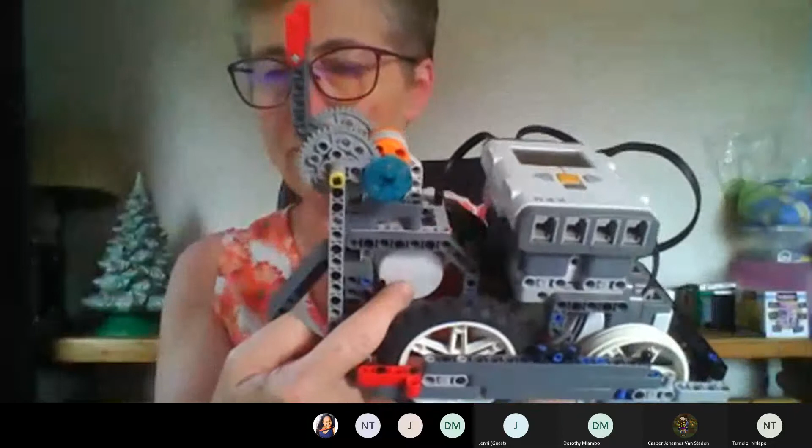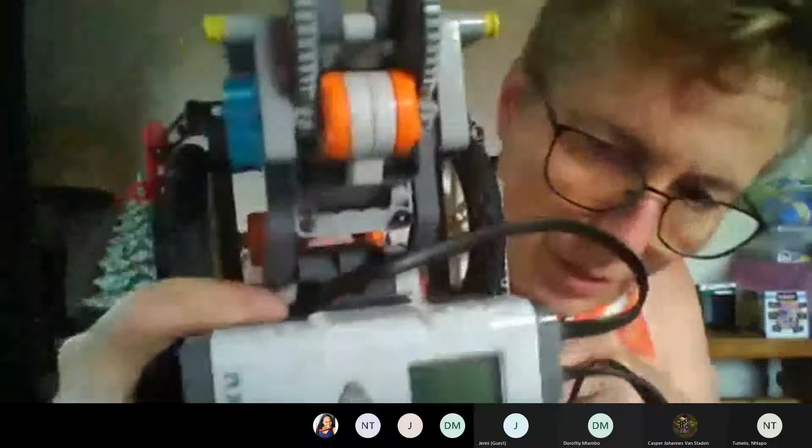So this is old Mozart. Mozart has got, you can see the motor here, and the motor has got an arm on it. So this thing goes up and down, so we can program this motor to let the arm go up and down. But the arm, the powered attachment that we're going to program, is controlled by gears. I don't know if you can see these gears over here, down here. So on the motor itself, through the motor there's an axle.

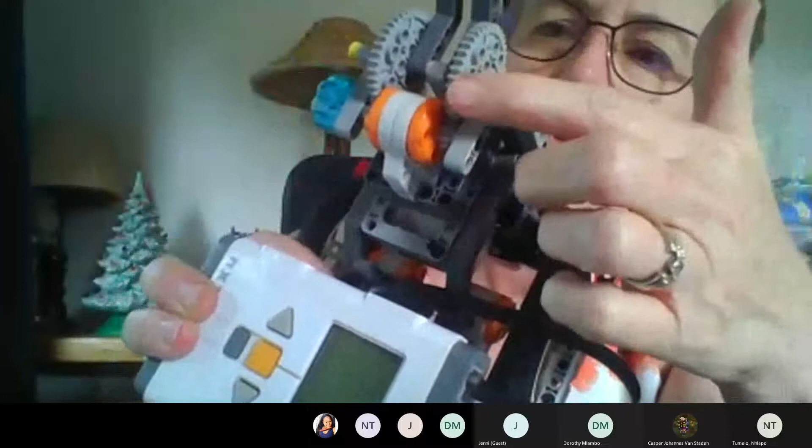And then there is a driver gear, and the driver gear and the larger gear are on the same axle. That is what today is all about. We're doing gearing and power attachments together, because gearing is applied in power attachments.

So what does gearing do? With gearing, you've always got a trade-off. You either have speed or you have power, and that's what we use gearing for. It's like a car. If you're in first gear, you have much power, but you don't have that much speed. By the time you get to fifth gear, you're going to struggle to go up a hill, but you have speed on the flats. So there's always that trade-off.

So with gearing, you've got a rotation or a movement, and you can use gearing to increase it, decrease it, or change its direction. I'm going to go through it.

So the gears of a robotics kit are always lots of fun. You get these things and you think, oh, this is a lot of fun, it'll make a real cool designer. But this is the rack from the rack and pinion. And then my favorite is the worm gears, and I can't find my worm gears in here, I have to go and look for them. Okay, so that's where we are.

We're going to do some gearing. Again, you can get away with building a robot without gears. You can get away with a robot with only passive attachments. But you want the learners to take the next level. So all those teams that are doing second year already with competitions, you need to up your game. There's always that ongoing learning of increasing complexity.

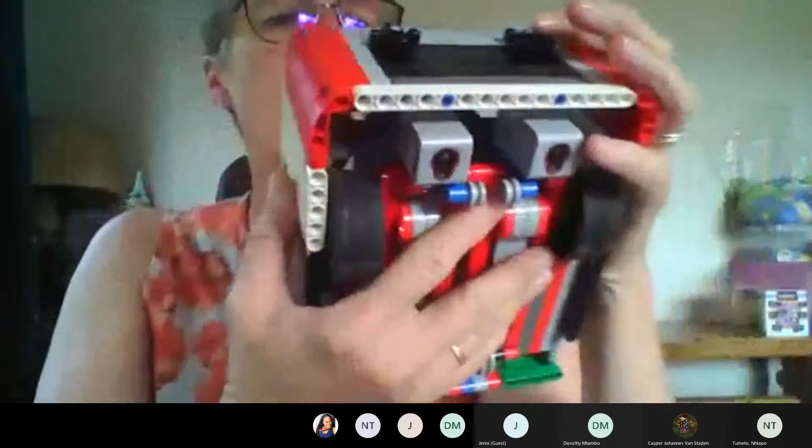So what knob gears are used for is, you can see on Mario, there's these two knob gears over here. But these knob gears are actually, can you see? You can't really see inside here. Inside here, the knob gears are attached to two medium motors, which means that you can then attach powered attachments onto here, and then the motion is transferred through this gearing mechanism. So your powered attachment is attached onto the robot, and the power part comes through here. You can use multiple powered attachments on these two parts, and that is where also for powered attachments you must have a motor that you can program.

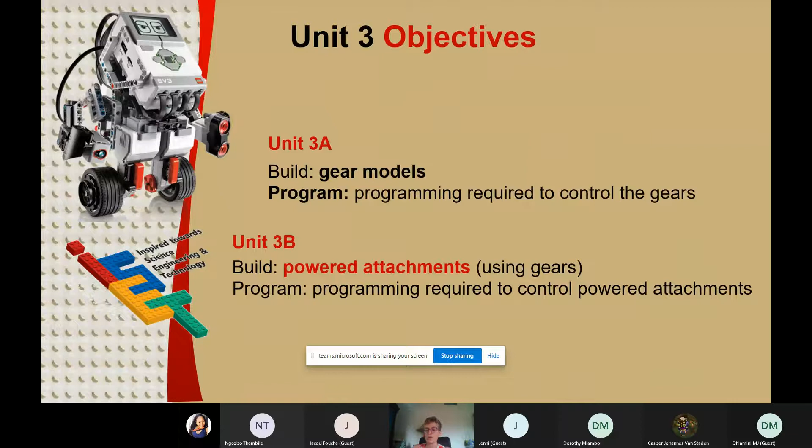Okay, so for unit 3, there's an A and a B part. The one is the gearing models, and you've got to write the programs to control those gears. And the next part is the powered attachments, hopefully using those gears. So you build a model and then you write the program, but it's important to test every combination, because otherwise your learners are going to think, I can do this, but they can't actually because they haven't built it.

All right, so a gear is any machine part that rotates. It's usually got teeth that mesh with the teeth of another gear.

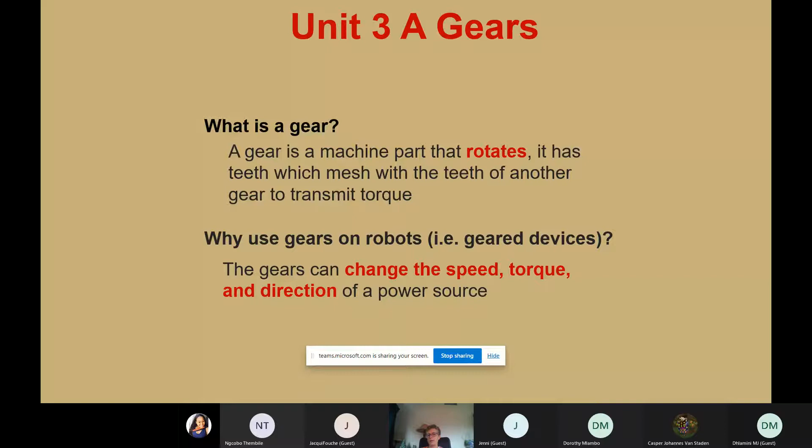And why do you use gears? Well, there's speed, there's torque, and there's direction of power source. So some of the gears are used to make rotational movement linear, and that would be, for example, your rack and pinion. Some would be to change direction, maybe for a bevel gear, where it changes direction of 90 degrees.

Okay, and I'll show you some examples. There's lots of really cool little gears in your robotics kit. So, for example, the rack and pinion. That is the pinion. This is the rack that moves, and the axle at the back there, that's the one that's attached to the large motor.

Building gear trains is a lot of fun. If you attach that axle that goes through the driver to a motor and see what happens, and then you try put the axle to the larger gear as the driver, and then you see what happens and how many times does one turn and how many times does it not turn. Okay, I'm actually going to show you an example quickly.

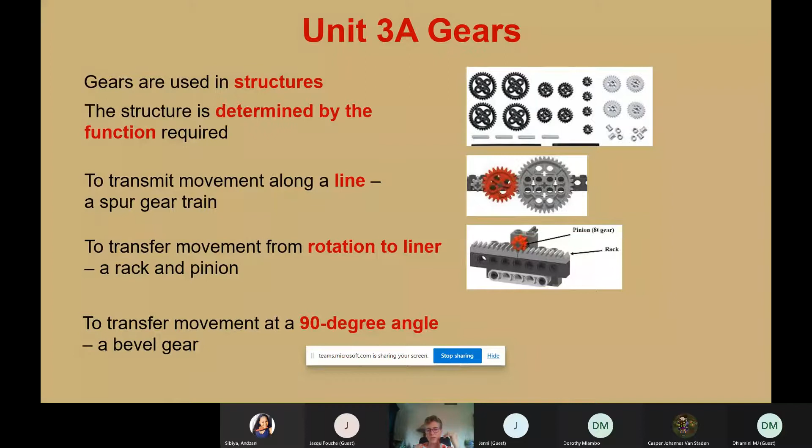And then to transfer movement, you always like the bevel gear that goes the 90 degrees, so they're meshing at 90 degrees. So these are the examples. The spur gear is kind of the normal little round gear. The crown gear kind of sticks up in the sky, and the bevel gear is at 90 degrees. You sometimes get double bevels.

The worm gear is one of my favorites, and the clutch you don't use that often, but if you do use it, your learners have to know how to use it. The knob gear, I think, is the most popular one, and it's one of those gears that you can use, and as soon as you use it, it gets confidence. Your learners can say, 'Oh, we can do gearing. We're good.' That's a really cool little gearing thing there.

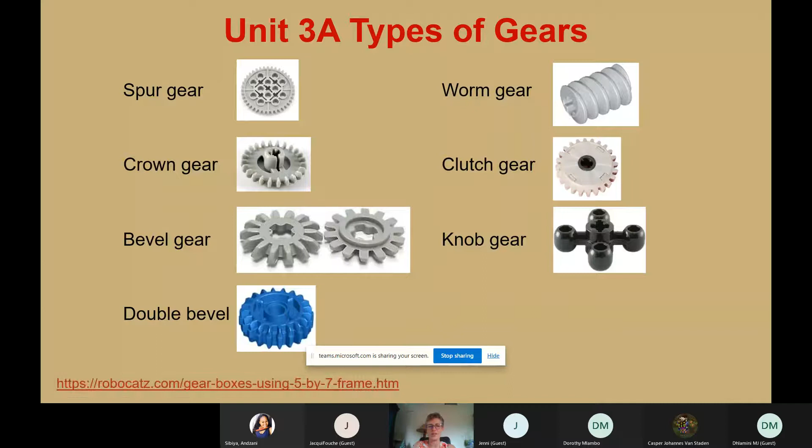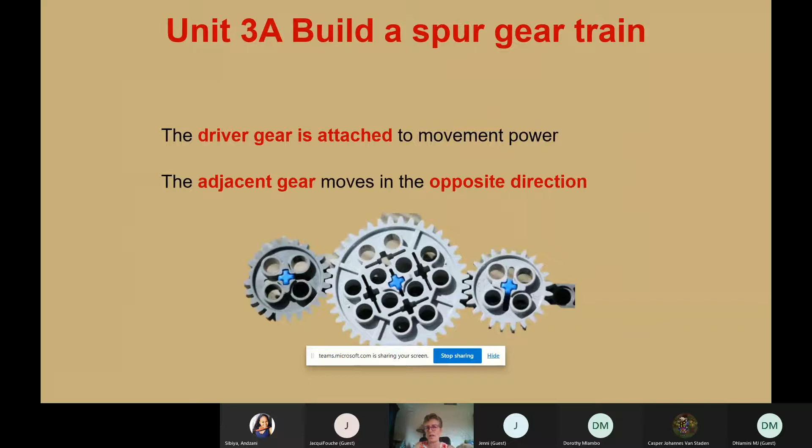When you build a gear train, you've got to have a driver, and then you've got to have a driven gear. But the little idler in the center, the learners have got to register that the one is moving in one direction, and the other one is moving in the opposite direction. And then so every second one moves in the same direction.

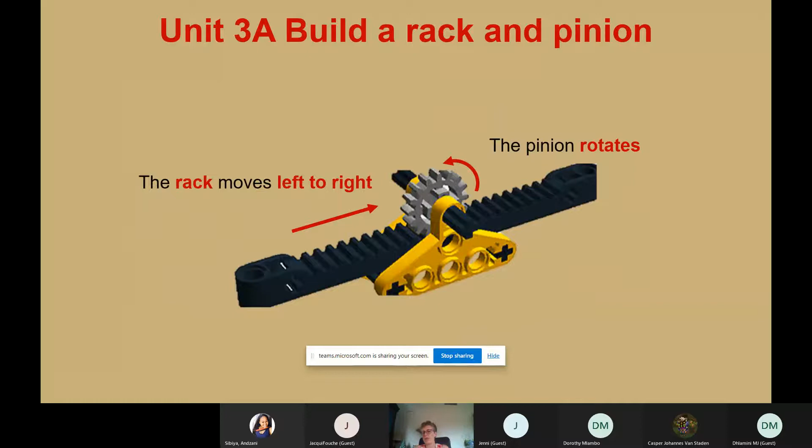The rack and pinion, you've got to know the pinion is the one that you attach to the motor. So if you're going to make the pinion rotate, then the rack will move left to right. But if you don't play around with it, the learner's not going to get it. You can show them as many pictures and little arrows as you like, but they actually have to do it. So I would say have a really good gearing class just to explore the gears.

If you're doing programming, so this would be programming - you attach a motor, say motor A, and you let it run for, say, 10 seconds, and you'll see what happens. That's just if you have a spur gear, then there's no restriction on that.

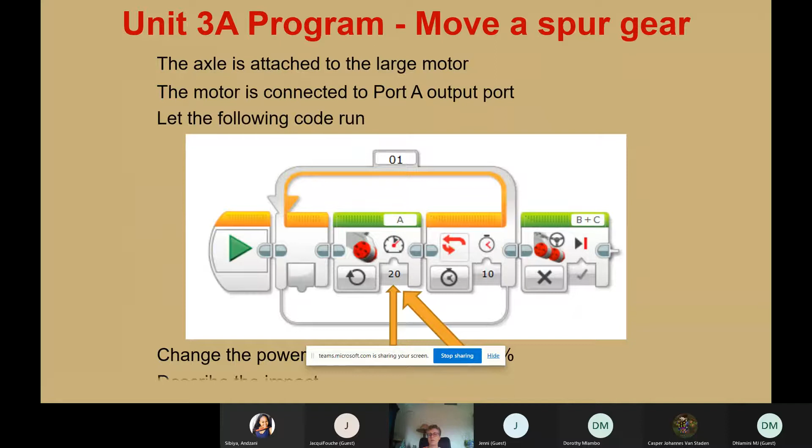But then change the power and say, okay, why don't we make it 50% power or 100% power or something, and then we'll see what happens. And then the learners must be able to explain to you what is the best gearing speed, or power setting. And the same is with the bevel gear.

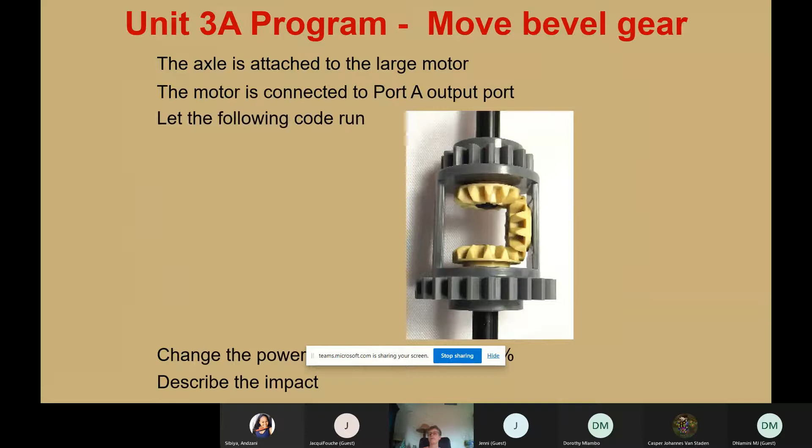The bevel gear is at 90 degrees, and you can run the code. It looks very nice and neat, but if you turn it too fast, well, maybe it's not going to be great. So let the learners do it at 20% power, 50% power, 100% power, and then tell you what the impact is. Now I'll show you some examples as well of different gearing structures that we have.

The problem with powered attachments is they must be well built, otherwise they are a total disaster. The other one, let me just quickly say, if you have a powered gear, you must have a motor. You can use gears in brackets, but it requires programming to function. If you use powered attachments, please always program with time.

Please program with time. I'll show you now an example.

So when you have a powered attachment, where do you attach it? Well, that depends where you need it. If you need to pick up something in front as you're going along, maybe in front, in the center, at the back.

A powered attachment can be attached wherever it is needed. But here's the kicker: it must be attached as a structure, and it must be connected with wire for function. Otherwise, it's not going to work. It needs structure and it needs function.

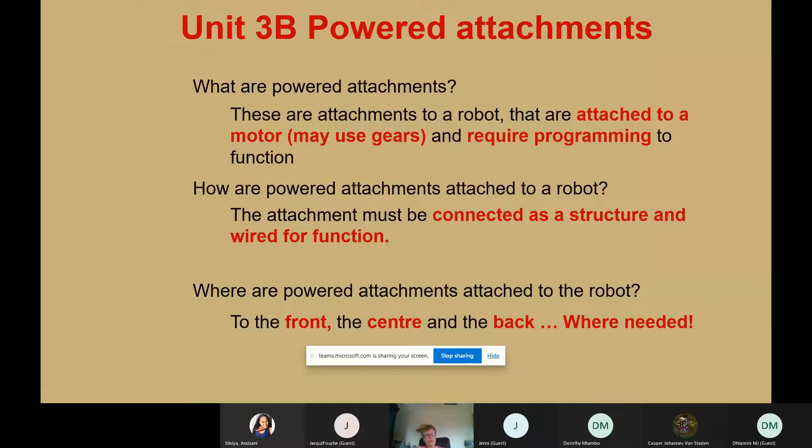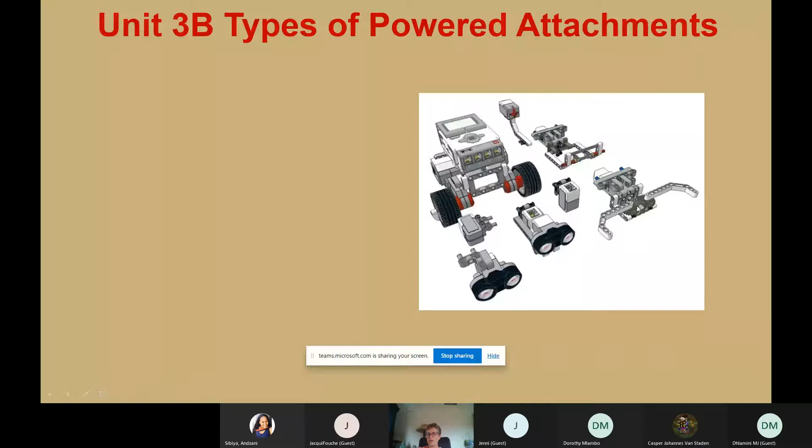So the cargo loader moves up and down. Can you see there? And the grabber moves left to right, and grabs something. So you can grab, you can lift, you can push.

But, and I say it again, let your learners first build these powered attachments from building instructions. And then you change, then you modify. Then you say, okay, so that one can lift something up, but it might fall through there. So we adapt that. This one could grab maybe an apple, but maybe it's too heavy - it's not going to be sufficient to grab a tin of condensed milk.

So the powered attachment is grab, lift, and push. But it can be multi-purpose. So the same grabber can go forward, collect, and reverse, or it can go hold something, move forward, and deliver. So already we have two purposes for one attachment.

Exactly the same as that - this one here with the cargo loader. So you can leave base with something in your attachment, and you go forward, and you can drop it, or you can go forward and pick it up.

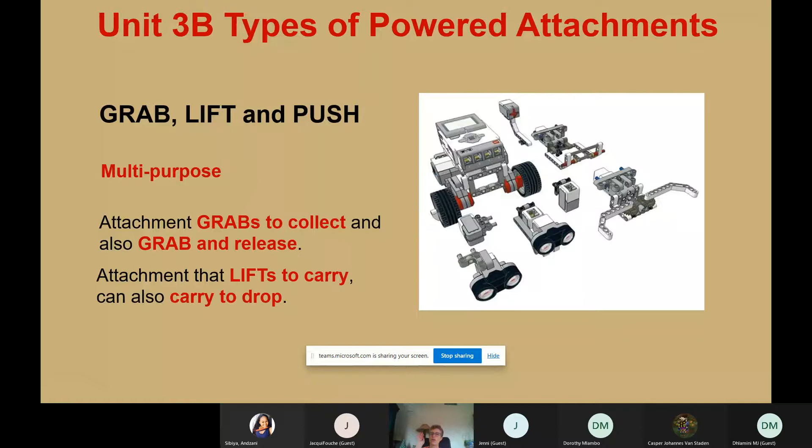But here's now the really cool part. If you turn that attachment around, same attachment, you've got now a multi-purpose attachment. And I'll share a really cool link now. So there we've got the gripper, and there we've got the cargo loader - two really cool powered attachments.

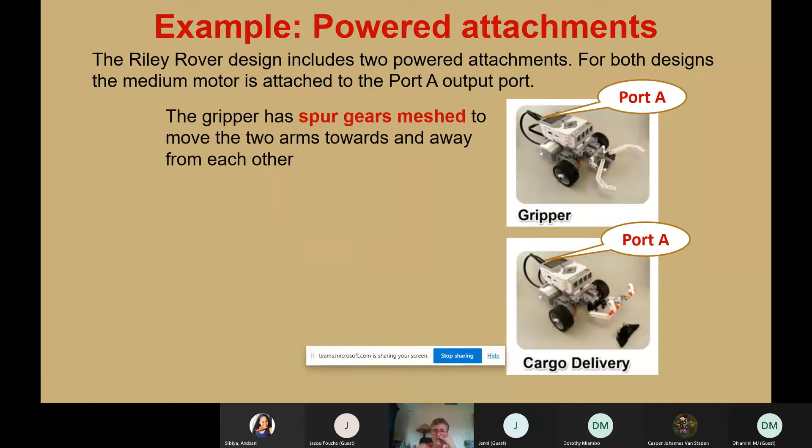Both are connected. You connect the motor to port A. So A and D are all the attachments, and B and C are the motors to make the robot move. So over here, if you've got the gripper, there you've got your spur gears, and there you've got a worm gear attached to your medium motor.

If the gripper is modified - well, if you can modify your arms, make your arms bigger, make your arms smaller, shorter, longer, stronger. My biggest modification, I would put little rubber - you get those little rubber connectors at the ends just to hold something better.

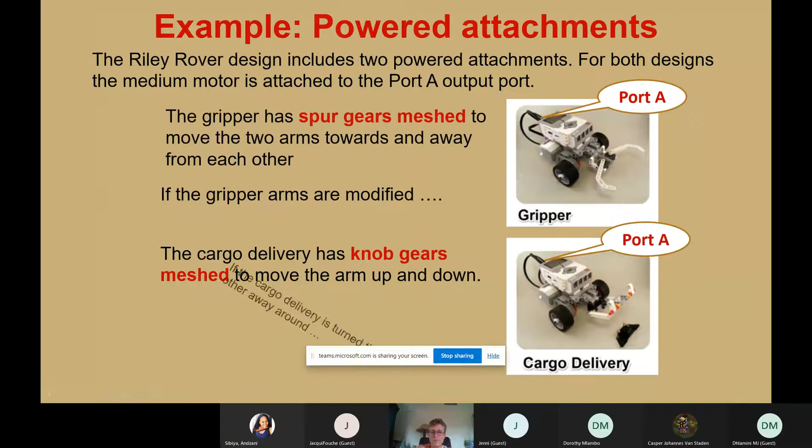The cargo delivery has a knob gear meshed, so you can see it over there. This lifts up and down, moves the arm up and down. But if it's turned the other way around, it can go forward, come down, and pull something backwards. So just as a picture here, this is your arm going up.

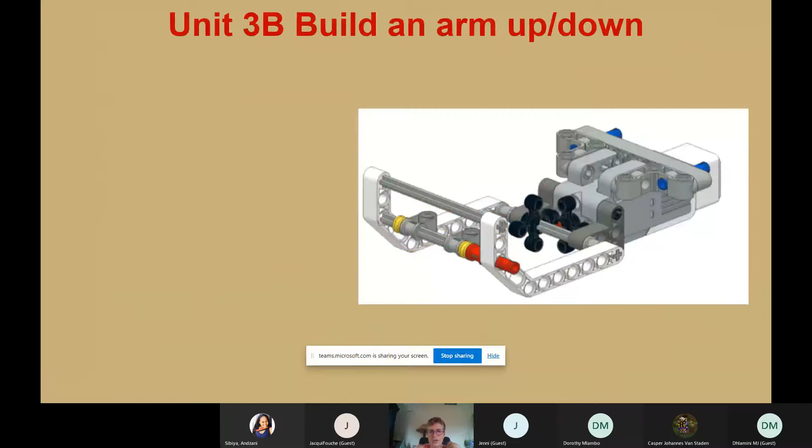So for the cargo delivery, if you see here, there are your knob gears, and then the arm can go up and down. So it's in front of the robot, going up and coming down. But if you want to carry a bigger object, you might need to make it longer, you might need to have sides on it. So that is where the structure changes.

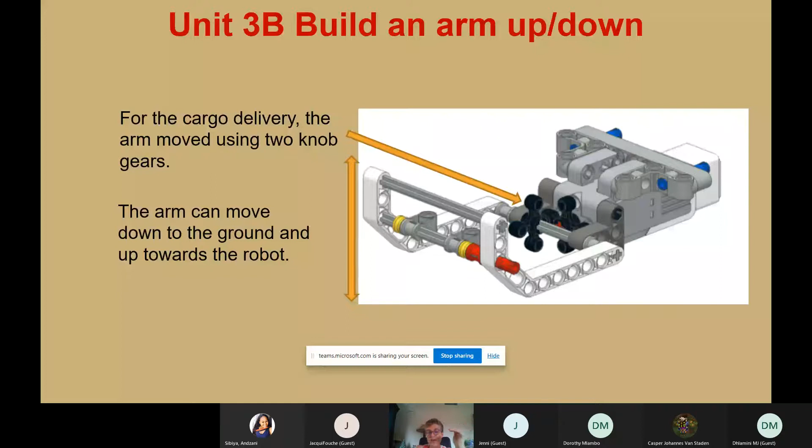So how about this one? This one is then your gripper. You will see that over here. Where's my mouse? There we go. You must make sure that that axle is free to turn.

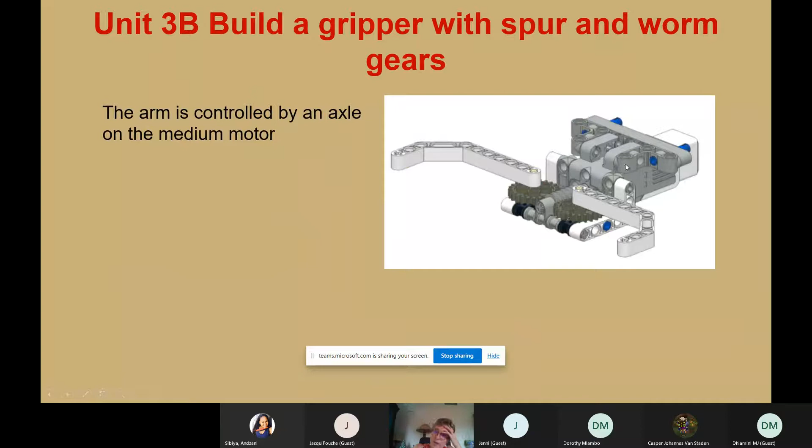So before you even put the spur gears on, just let the robot's motor rotate, I don't know, two rotations, just to make sure that worm gear is actually turning. And if it's turning, then you put your two spur gears. There's your meshing with your two spur gears there on the other side. They're obviously moving, and then they're controlling them. Let me just go back here. So linked.

So as this thing turns, this arm that's linked to a little axle or connector turns. And as these turn round and round, this arm will come in and go out.

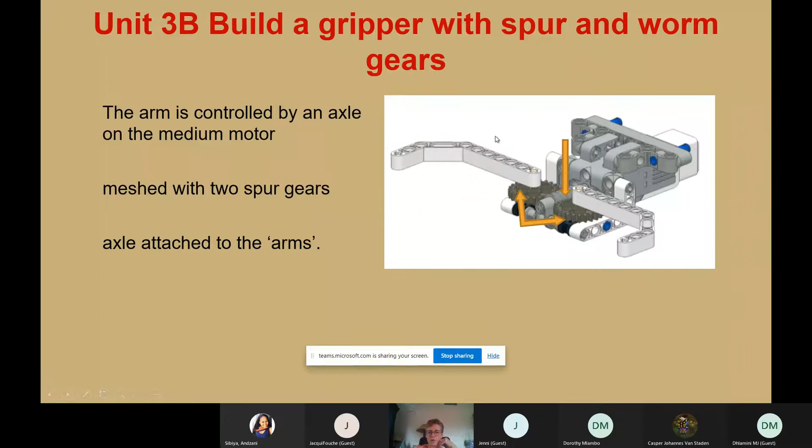Right, so for every attachment, you build the powered attachment, attach it to the robot, and then write a program to function it. You've got to do all these steps to make sure your learners understand in their heads how a powered attachment works.

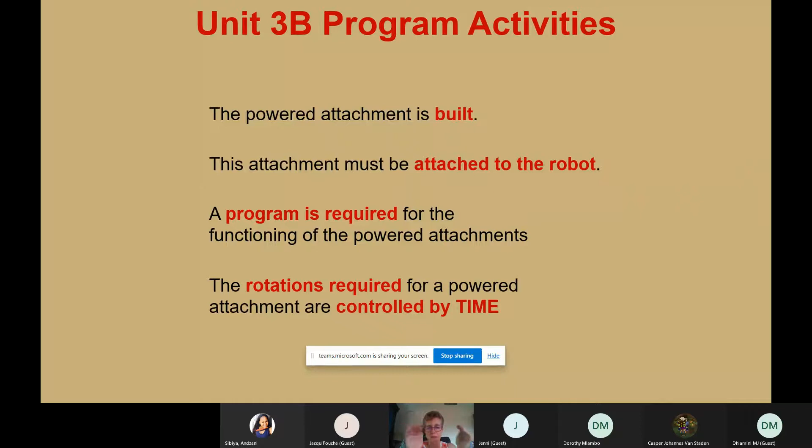But please control the powered attachment by time, and I'm going to show you why. A good idea before you start is to test whether your powered attachment is going to go up and down. So you have a starting position, let it rotate for 1 second, and if it goes up, then great. So if it's positive, it goes up.

So negative, minus 20%, minus 20 power will make it go down. So then you can make it go up.

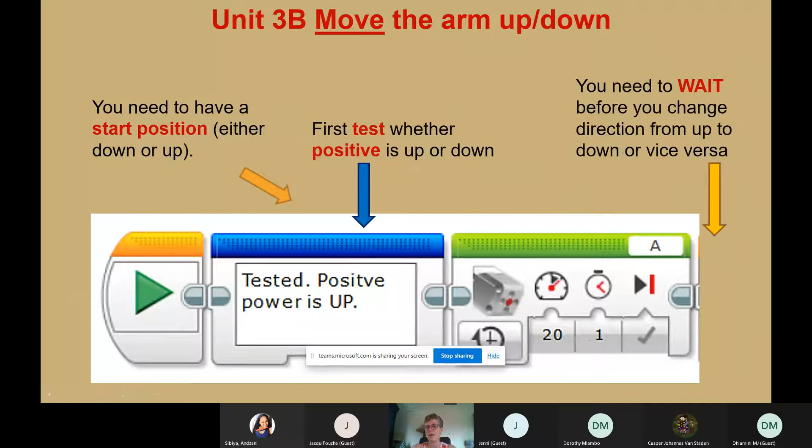But number one, you must have a comment—just put in a comment to know what you're doing. And there must be a wait. You can't go straight up, down. So you go down or come up, then you wait for 1 second and change direction. Good habits to get into when you're programming.

So if up is positive, then down is negative. And think of this as a task: must move forward, drop something. So as an example, there's the positive, so it goes up.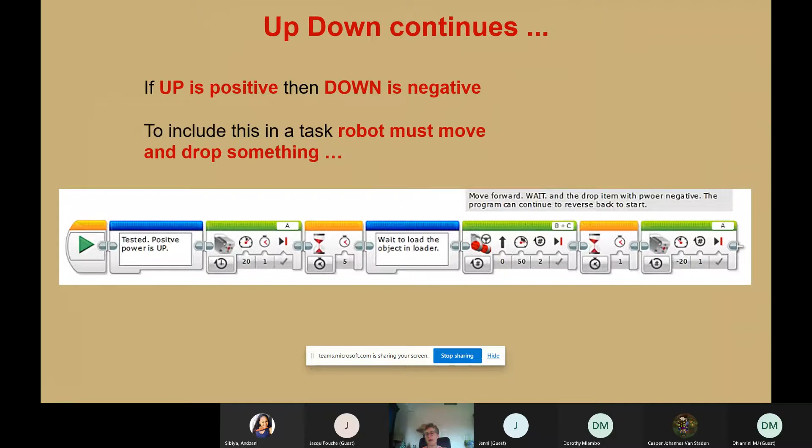So with whatever you're doing, it's very important that if you go up, you go down; if you open, you close. Whatever you do—maybe I went a little too fast—wait, okay, you must have a starting position. I'll demonstrate this now. You must test whether positive is up or down, or open or closed, and you must always control it with time.

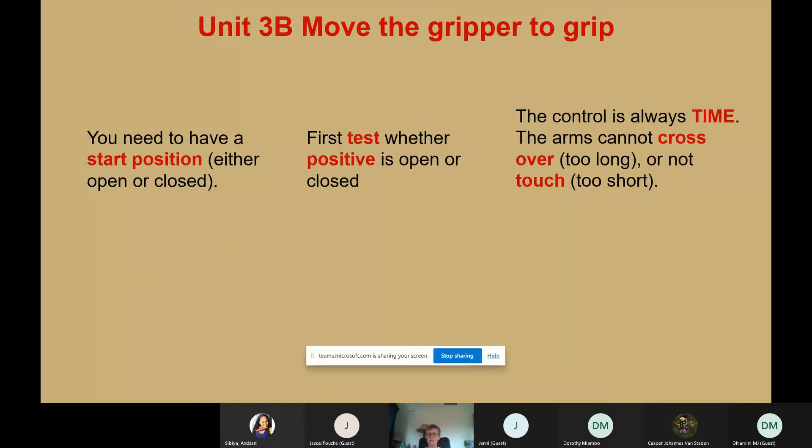The bad thing with a gripper is that the arms cannot cross over. If they come together and cross over, you've programmed too much. But if they don't touch, they might be too short. At some stage, the arms must actually be able to grip something—if it's a gripper, it must be able to grip. You might need to modify the structure.

So what I want you to do: when you do powered attachments, build the powered attachment and then program it. Add it to your robot and say, okay, how are we going to use this—go forward, drop something, pick something up. Then try with additional items, but you must evaluate the efficiency of your robot.

You need to have an evaluation. Please don't let the learners just assume they know what they're doing. They need to be able to justify why they've got the powered attachment, how they've used it, and whether they can modify it.

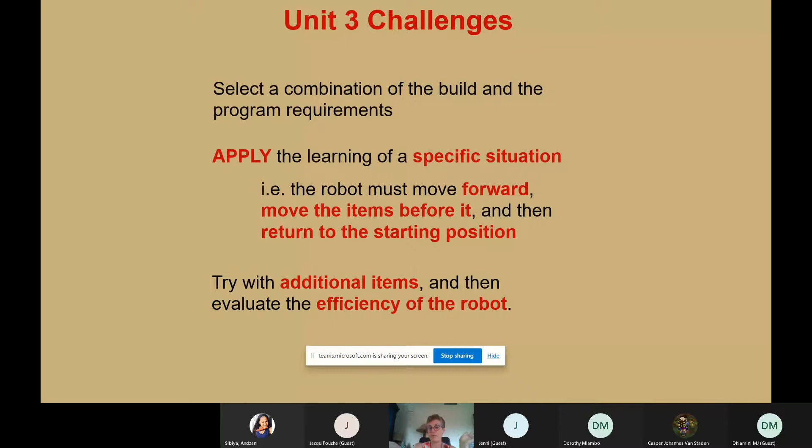In terms of gearing, there are a lot of really cool little videos—the dog gears, Builder Dude 35 does a good job of that. But there are different types of gears, and it depends on how much time you want to spend on gearing, because now you're assuming your learners are going to apply it. Maybe think about that one, the whole thing of gearing and powered attachments.

I've got the Winning Design book. This is for EV3—they haven't brought out the design patterns yet for Spike, but this is a really cool reference to have, and I've learned a lot from this guy.

Okay, so for Unit 3, you've got 2 quizzes. You can do one or both, or you only need one of them for the assessment, and then you can talk to us. All right, and I think that's the end of that one.